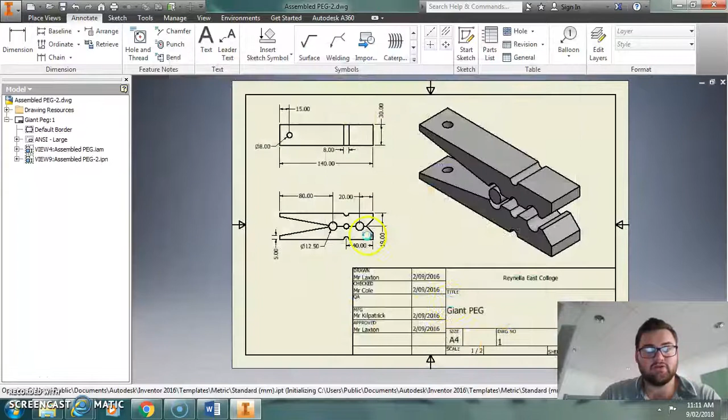So to start that, we obviously need a new sheet. That's the picture of the peg. We'll be referring to that for our measurements and things throughout. So I've got it here. As you can see, it is quite large because everything's in millimeters: 140 millimeters long, and it is also 30 millimeters wide. So yeah, it is quite large.

So what we're going to have to do now is use these millimeters. I generally make a blank first, so without any of the holes in it, I'm just going to make that peg shape. I'm going to have to make it 140 millimeters long and then 19 millimeters up, etc. Okay, so let's get started.

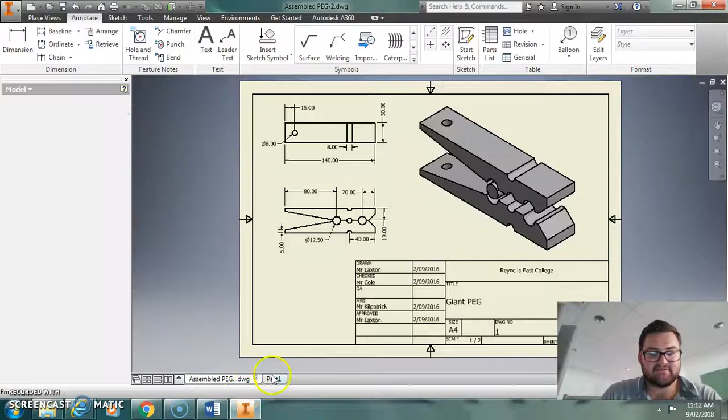So if I bring up this 2D sketch, opening up here, rotating it around. The first thing I'm going to do is my baseline, and we know this is going to be 140 millimeters long. Okay, so now that's done. We know at the rear it's going to be 5 millimeters high.

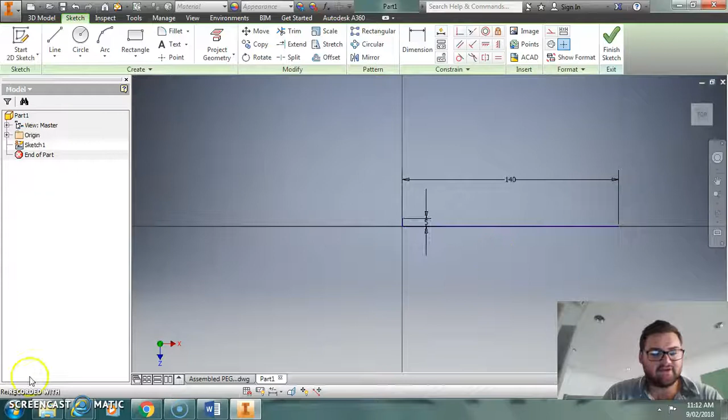Okay, so we've got those two done. Finishing those two, now we're moving on to this one over here. We're going up 9 millimeters. Okay, now here's the tricky part, because we want this all to fit together, and this top section is, as you'll see over here, quite difficult to do. Even with all the measurements telling us what to do, you can see that doesn't go all the way up to the top of the peg there. You see it's slightly lower than the actual middle section.

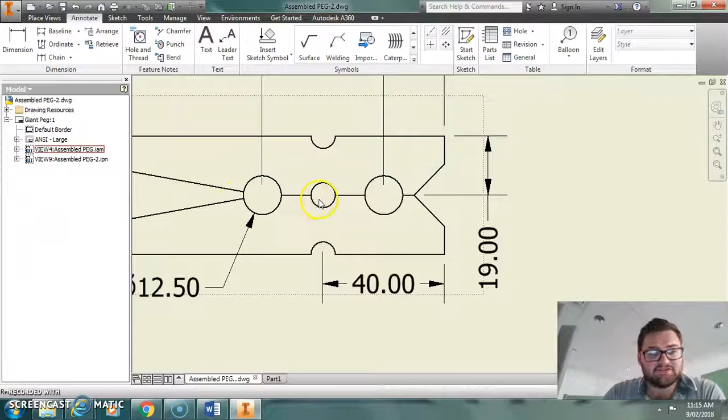So what we need to do is actually do some calculations in our head. We know half of 12.5 is going to be 6.25. So whatever the measurement is across there, we're going to have to add on 6.25. So if I go to the Dimension Tool, and we'll add on, or we can just go to the edge there, that's 56.16. Okay, and that's to the middle of that circle.

Oh no, it's to the edge of that circle. So we actually want to go from the middle to the edge, so that's 50 millimeters. Okay, so you can see there that if I make a straight line from there to there, it's going to be 50 millimeters. So that's what we need to do, and we can actually dimension that afterwards.

So if we go here, we make this line. It doesn't actually matter where we make this line. Okay, I know I'm saying that, and in this program you need to make sure everything's exact, but I can make that there, have it the right dimension, and then actually dimension it afterwards.

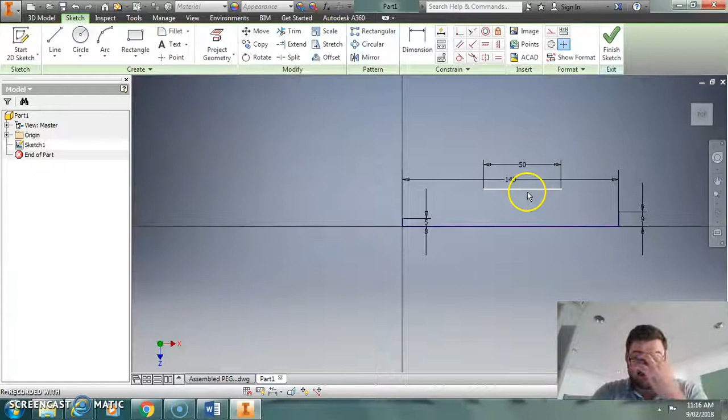So I can actually use the dimension tool now to make that 19 millimeters. Okay, so you'll see that it moves down, and then I know, sorry, I'm trying to go to the wrong thing. So that's 19 millimeters up, that's 9 millimeters, and so that leaves 10 millimeters more up.

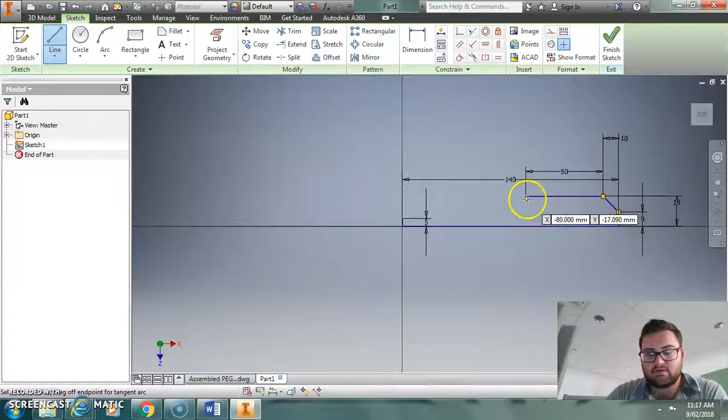Okay, so what I can do is move this, dimension that from that. So it's already 10 millimeters away, so we need to go this way and make another 10. Okay, so then I know that line that goes down there is going to be perfect. So I can put this one here and this line here.

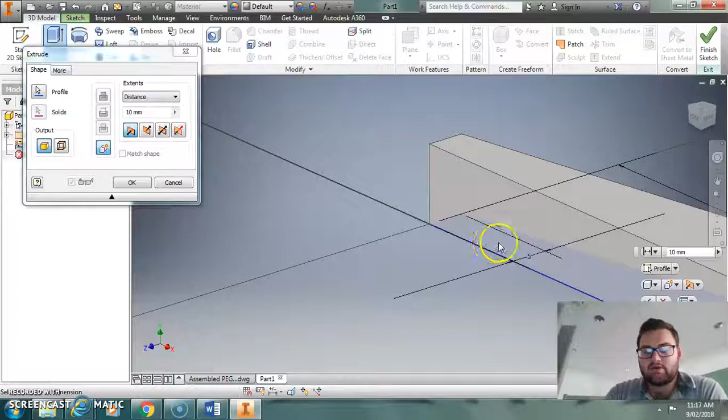Okay, so that's the basic, as you can see, without any of the circles cut into it, that's the basic outline of the peg. Straight line across, down, down, and across like that. Okay, so that's how it looks. So all I need to do then is extrude that. 3D model, extrude, and we know this is going to be 30 millimeters. Okay, we can see it on the drawing we just had up.

And zoom out again. Okay, so now what I want to do is make all the circles and then cut them out on this. So to do that, we need to go back to our drawing. We can see where all the circles are in relation to the ends here. Okay, so these circles, they're all 12.5. So if I open this back up, I know this one is going to actually be just on the edge here. Okay, we calculated that before.

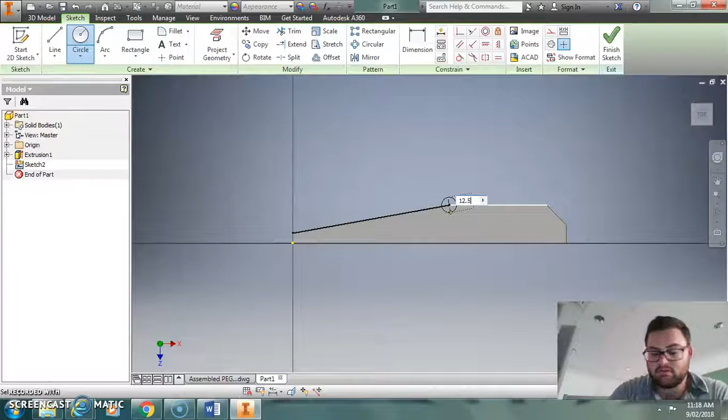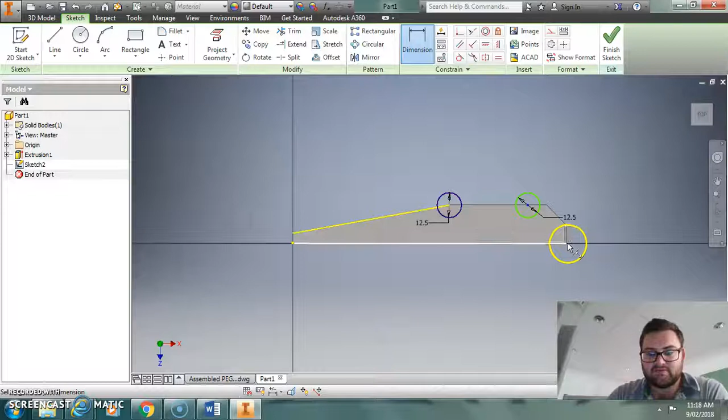Okay, the next one I can just choose anywhere, at 12.5. So with those there, that one's actually on a set point. This one's not yet, so let me have a look. I know it's going to be 20 millimeters from the edge, so I can dimension it, and I want the middle of this to be 20 millimeters away from there. I was actually really close - you can see that moved it over a little bit, and that's cool.

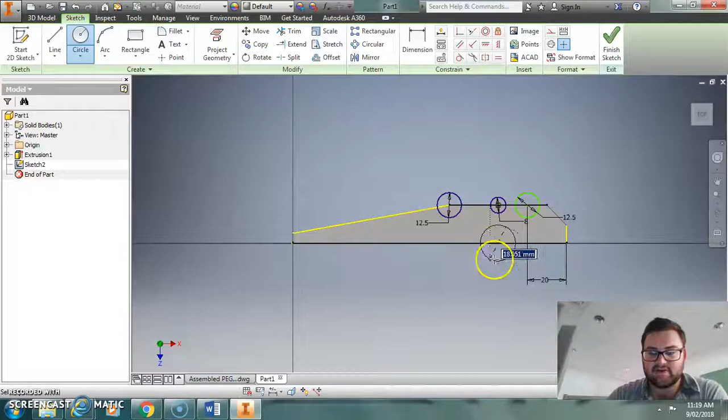Now we want to have a look back over here, and we know these small ones are going to be 8 millimeters. I can actually do that just in the middle. And again - you see how all these lines are snapping themselves, that dotted line snapping it so it's in the middle.

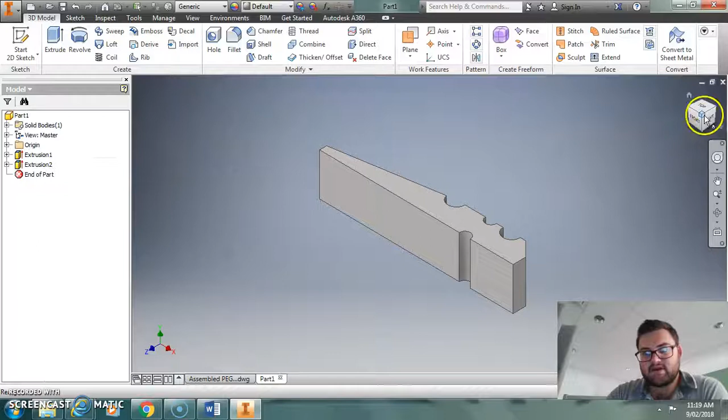Alright, so I've got my two 8 millimeter lines. Right click and go OK. So I've got all these to cut out. If I go 3D model, extrude, I've got all of those, and I just need to change this to cut. Now I've got the bottom section of my peg almost underway.

So the one thing we're missing on this, as you can see, is the hole there. We know that hole is going to be 8 millimeters from this drawing up top, and it's also going to be 15 millimeters in. The reason there's that measurement and no other measurement telling you how far laterally it's going in is because you just presume it's in the middle, if there's no drawing or no measurement.

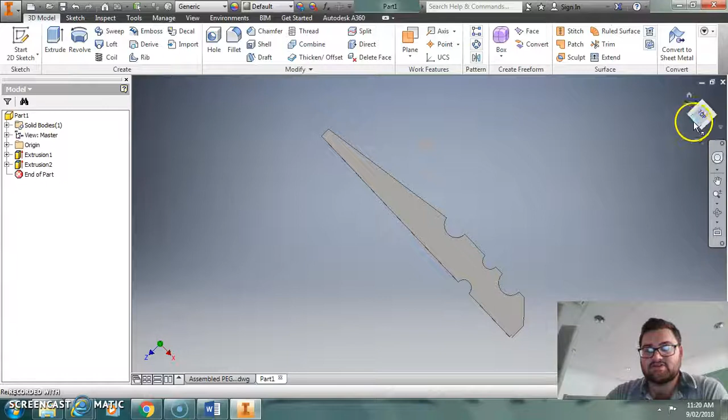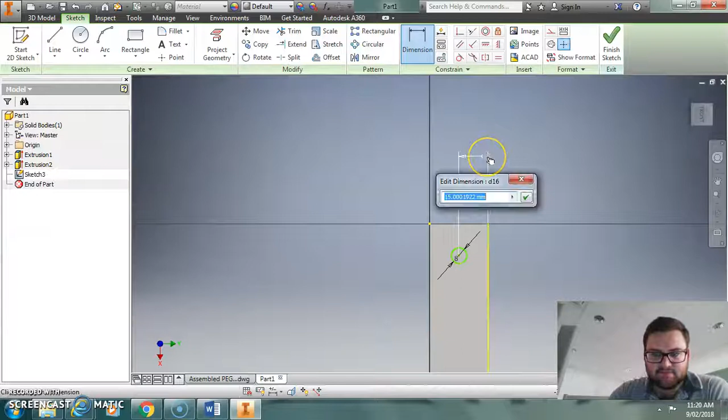So turn this around, we're drawing on this one - left click and then add new sketch. We want to add an 8 millimeter hole, and we can dimension this again. As you can see, without any lines or anything, it's not going to just snap to the right spot, although again I got pretty close, surprisingly - that never normally happens. 15, so now we know it's perfect. We can go 3D model, extrude, and we're going to cut this one out as well. Cut, done - and there's the bottom section of our peg complete.

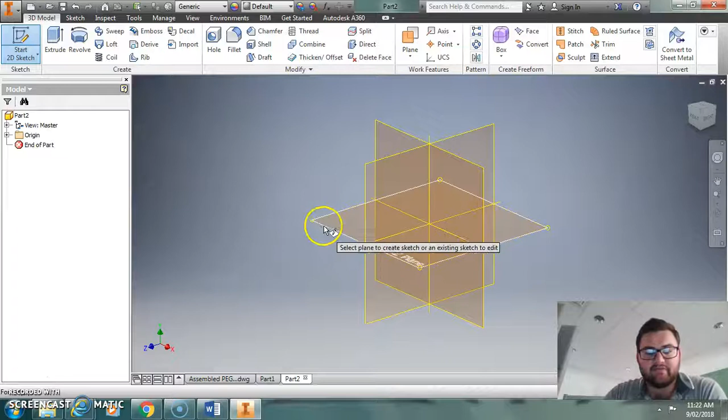So after finishing that part of our peg, the last thing we need to do now is make that little insert part. We're actually making a new part for this one because, as you can see, it fits in the middle there. We know it's going to be 8 millimeters because it has to fit in these holes.

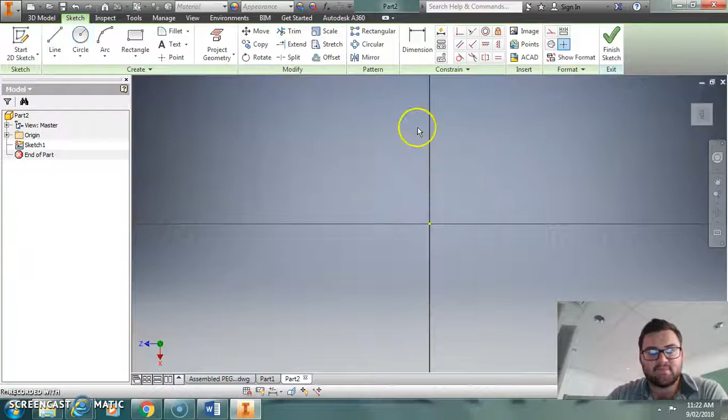So if I go back over here, it's as simple as going to circle tool, doing that - oh no, we're in inches. So if you ever do get stuck in the wrong units, make sure you go back over to tools, document settings, change it to millimeters and go OK. You don't have to close it and then start again. Okay, so that's just a quick one there.

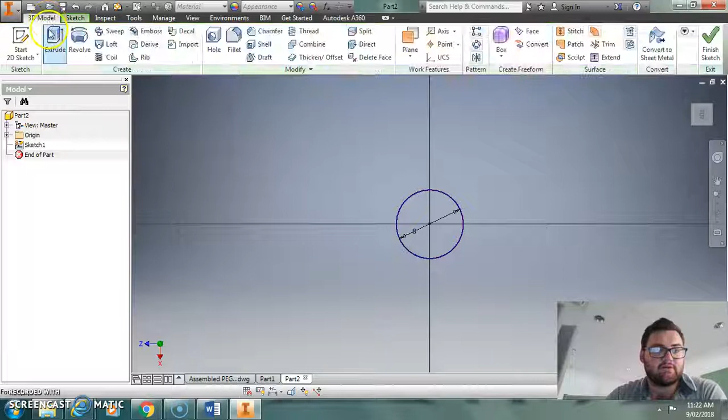So going to that, making that 8 millimeters. Then going 3D model, extrude, and we know the width of our peg is 30 millimeters, and so that's done.

So once we've done that, we've got our two parts, and as you can see, we can always just use - we've got the bottom, we've drawn this part that we can then use for both the top and the bottom because it's generic, and then we've got this part that we're now going to use for the middle.